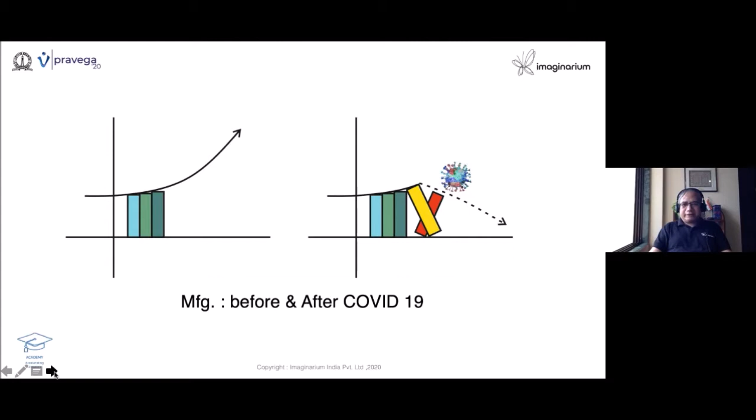Ideas are very fragile. If not parked, they will fly off. It's very, very important. And ideas are highly contagious also. So when you externalize an idea, it is very important to park it. So externalizing - whatever thought you have, you externalize it, putting it on a paper as a sketch, a doodle. And more people will look into it and they contribute to it, and that's how it is improved.

And then after you make the improvement, it has to be tested to make it better. Ideas - there is nothing like a best idea. Ideas can be better. Keep on. It is a continuous process, just like excellence. How excellence is a continuous journey towards making yourself better. Idea is also like that. Idea can only be better. There is no best idea ever.

And how ideas have been done in industry - we externalize the idea as a sketch, and then a lot of prototypes are made, and we are going to see some of them meet the needs of desirability, feasibility, and viability. These are three things which will drive how ideas reach the end user. Then you are said to have done the innovation, taking it to people.

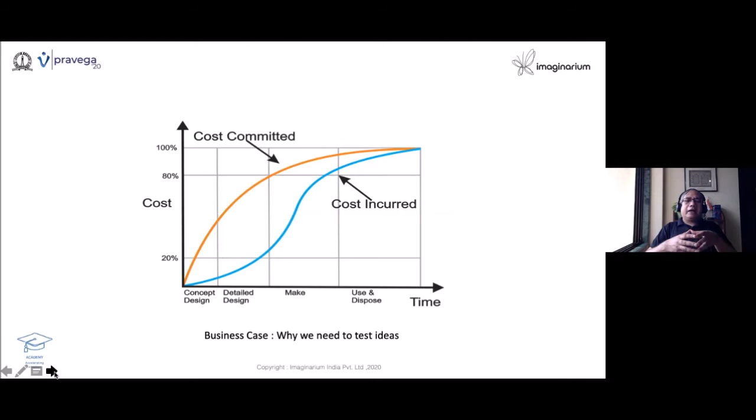And when you do detailing, and when you want to make it, somebody has to finance it. The cost committed curve you can see in orange, and the cost incurred curve, which is in blue - they are opposites. And that's why enterprises all over the world want to test the fitness of an idea, how good or how bad it is, before actually funding it. And that makes us - the idea has to be tested before it can go forward.

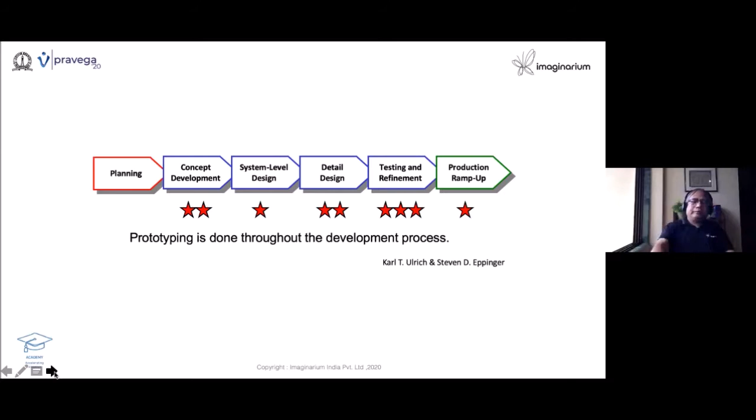So product designs are getting refined and tested till you make a somewhat good one. Then of course production ramp up also, people use prototypes. How we have been doing it before: people used to make ideas using clay, a putty material, or cardboard, or in electronics we use breadboard.

As a ham radio operator, I used to manage for some time the club station at IISc, called VU2IIS. We used to have a lot of electronic stuff, circuits, rig up and check whether it works. It never used to work in the first place. That's a new trigger to learn about why it is not working.

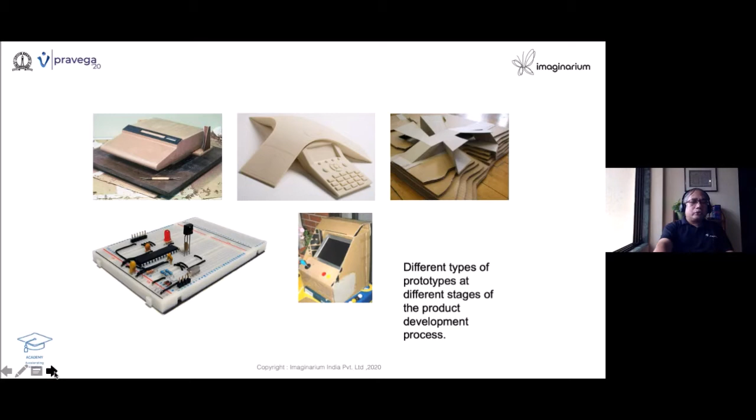So in the design iterations, a lot of these things keep happening, and it is a continuous cycle. You check and check, and then you go ahead. Today, with the advent of computers, all of these have become virtual.

You can do all kinds of animation, simulation, giving actual color and finish, those things. You can also have virtual testing by simulating on a software whether the component is fit for its intended use or not. You can even check the kinematics by having a small animation run, again a simulation.

But when you go to the industry, the boss, the people who finance or venture capitalists, you tell them, okay, I've done a design, it works fine on my computer - they'll not be convinced. You need to make them convinced by actually offering something which acts and works and demonstrates the capability. So the touch and feel of a real model is very, very important.

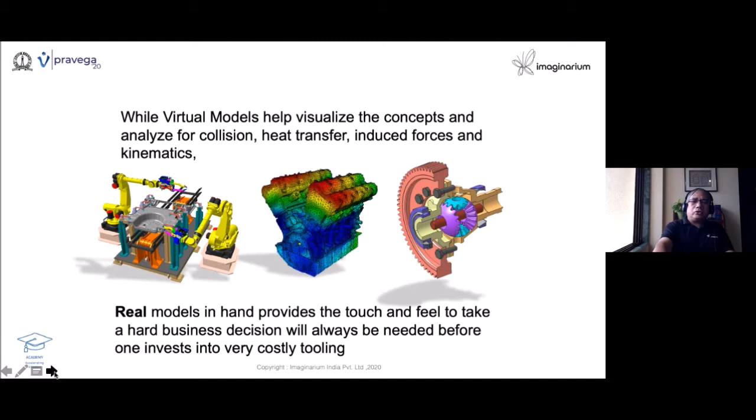And this is where many designs used to fail. There are several valleys of death. One of them is an idea which was not able to demonstrate to the quality level you intended, and that was the greatest disadvantage. And if you want to make a clay model and things like that, you need to have a lot of skill. So the whole world is looking at the prototype landscape.

If you see, it is born as a doodle, and you may go and do detailing on an engineering drawing sheet or AutoCAD. Then you can even have a 3D virtual model today. You can 3D print it. And if you want to make a working model, for example, you actually need to go to a lathe or a milling machine and make it.

So the final product will cost you a lot. A doodle doesn't, but the fidelity - a doodle cannot be tested, while a metal nut and bolt, what you see in this example, for simplicity, is going from abstract doodle to a concrete working model. So you can see here, the price will mount, the time and effort required to make a working model will also mount. Thanks to some new technologies coming, we are able to highly de-skill the whole effort.

That is the topic today. I would like to talk about bringing ideas to life quicker and better. And time to market was always a problem, even today.

You can see in the pandemic times, the whole supply chain was stopped because of the global lockdown. So people had great difficulty taking care of those things. But people who had agile manufacturing techniques were better off. Due to the pandemic, a lot of things needed hardware, and people were able to do it quickly using some of the new technologies which we discussed.

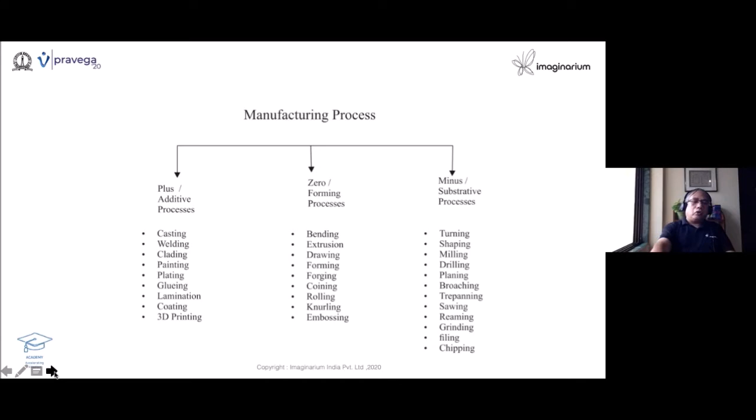Then we have the conventional manufacturing, which is largely comprised of turning, shaping, milling, drilling, planing, broaching, trepanning, sawing, reaming, grinding, filing, chipping, and it goes on. And you can see this is a very simple graphic which shows what is a cutting, what is a joining, what is a forming process.

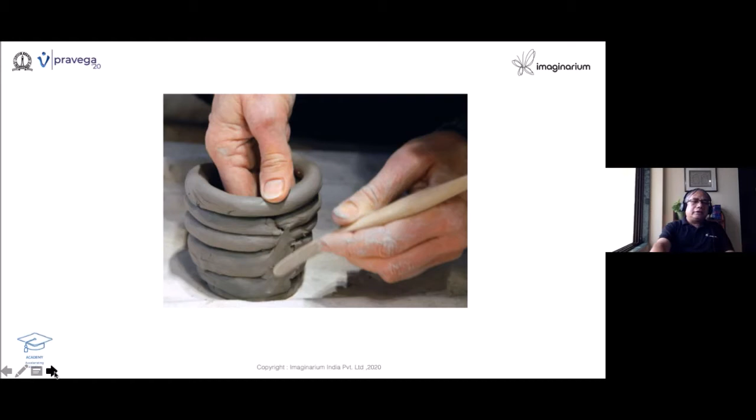Man has been toying with these, making things from the early civilizations, right? So here you can see a way of making pottery by pinching method, and this is like a turning method. And here you see there are rings which are put together one above the other, and you smudge them, and you get a pot, right? And this resulted in a lot of these things. People used to use it for storing water, storing grains, and even storing their money.

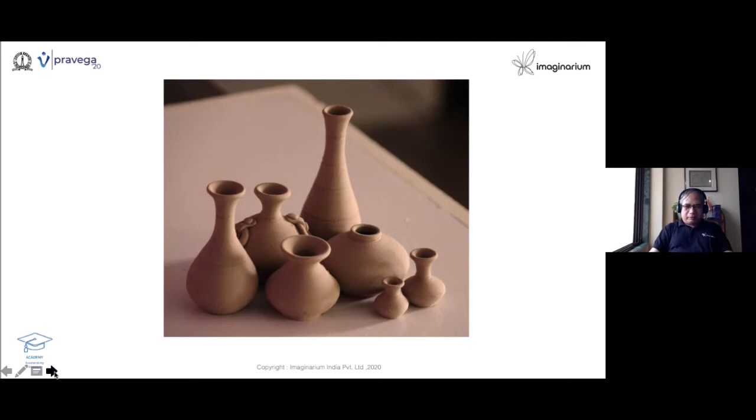Recently somebody has got gold coins in Israel, somewhere in the desert. So it used to be, they used to be better than your banks. You can store it below your own house in the earth.

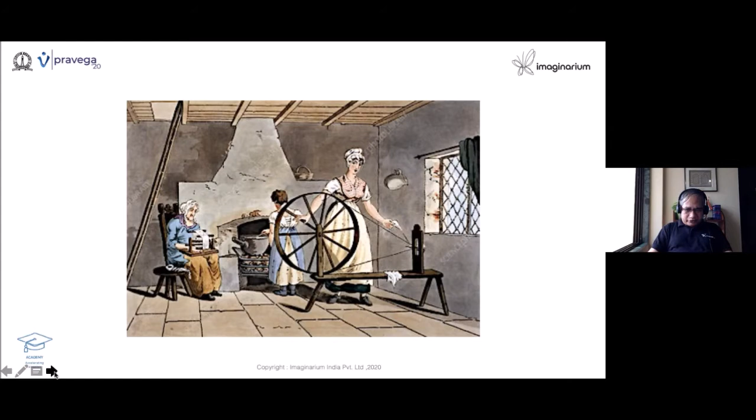Early making was always handcrafted. It was born for self-use, most of them. Like how probably you have not seen this, our grandmas used to make sweaters for us, a topi for us, and all that. So it was for self-consumption. That gave rise to cottage industry, you know, and further it gave rise to a lot of things.

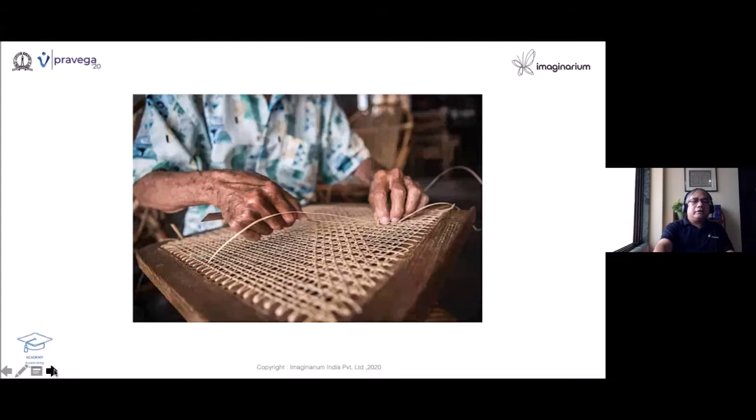So this led to what is known as industrial revolution, which made us look for things which are going to give us better efforts, the mechanical advantages. So machines were born, the hand tools were born. Hand tools, in fact, go to the antiquity. Man took a stone and made it into a tool, right?

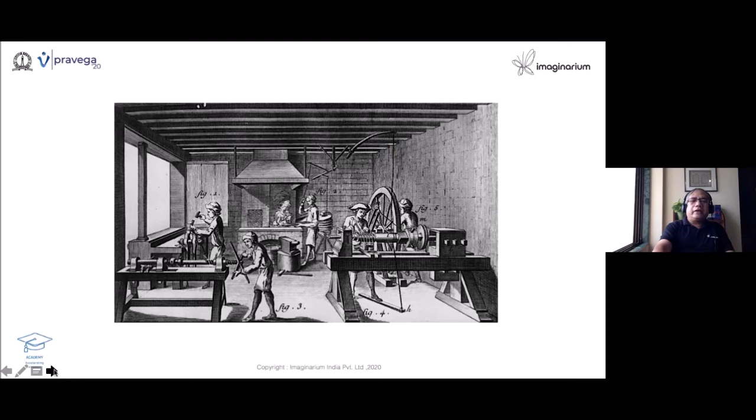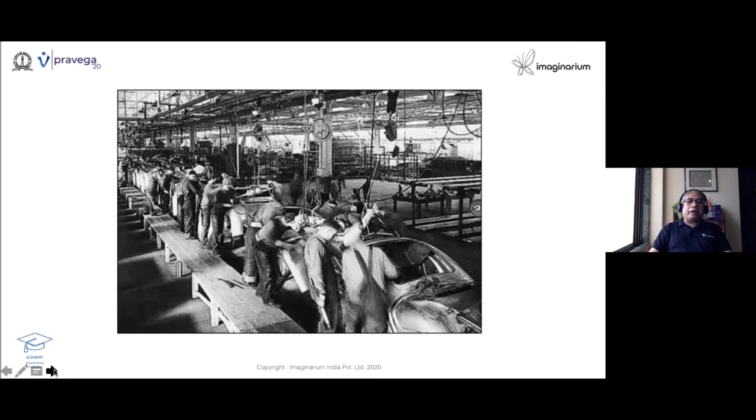Industrial township was born. And then you have the production line system. This may look like a cow shed, but it's actually Ford Automotive Company's first production line. You can see how people are working, each one adding a bit to the product. And as the chassis enters in one end, the car goes out on the other with all the four wheels put, right?

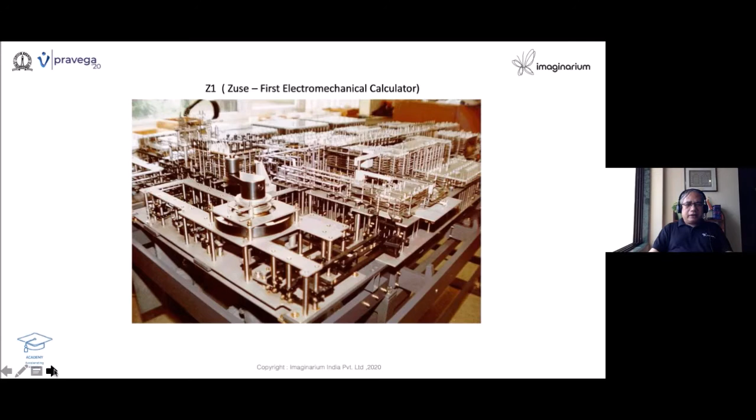And then came the advent of electromechanical devices, valve, then transistor, ICs. So you can see there is a continuous digitization of manufacturing that started happening. So if we recapitulate all this, we have the so-called industrial revolution 1, 2, 3, and 4.

So 3D printing is a new way of making things wherein people could convert any CAD into a part. It is a regime wherein people don't have to have a blueprint and give it to somebody to machine it. So the skill aspect was taken care of by a robot. I call it a robot because robots do their job. You don't have to instruct them anything apart from loading something, energy and programs, right?

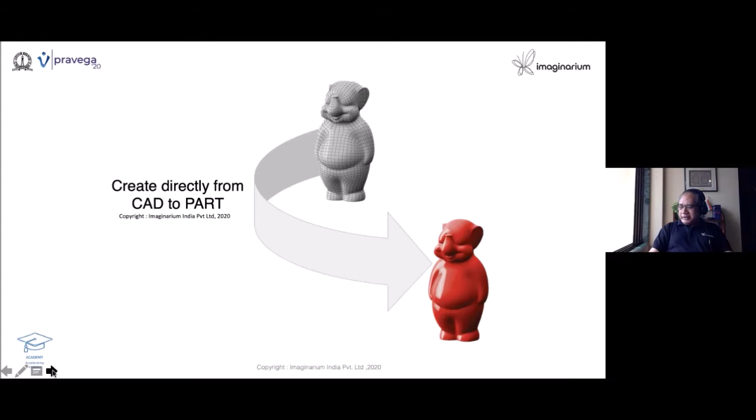So the same thing happens with the 3D printer. It is going to create objects directly from CAD data, which is virtual data, and that is converted to a physical model you can hold in your hands. So this has made bringing ideas to life much easier than before. And you can see it can not only make one-off parts, but it can make every time a different part.

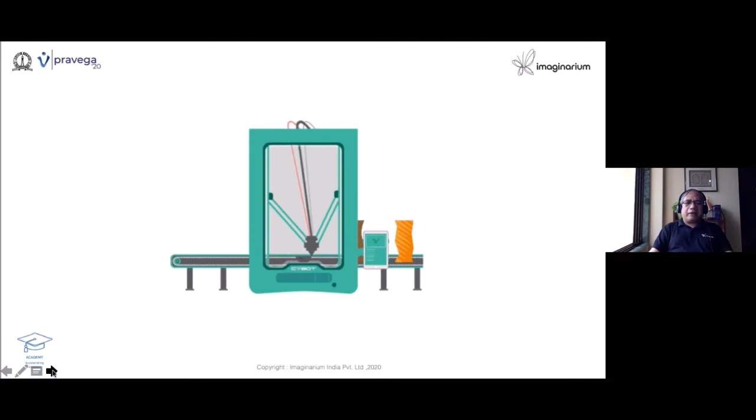And so this is the extreme agility that the technology offers. In fact, people think of 3D printing as different things. Some say it's a liquid process, some say it's a powder-based process, some say they've seen a 3D printer work with a filament. I think they're all right. It's like blind people looking at an elephant, thinking it is different things.

So 3D printing is something like an elephant. There are different types such as SLA, SLS, FDM, LOM, binder jetting, material jetting, and so on. We'll take a deeper look soon.

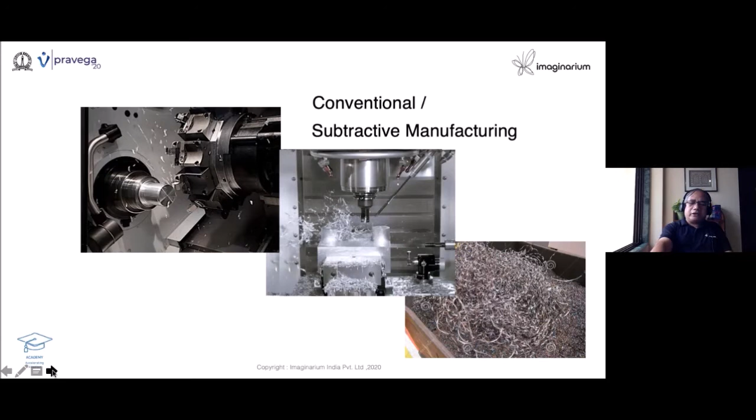Now we can see conventional subtractive manufacturing. You can imagine, in order to get one component, you have to remove a lot of material. That means a lot of energy is required and a lot of scrap is generated. So conventional manufacturing was not really a very efficient one.

If you compare it with additive manufacturing, where material is used to build instead of removing material, you can see the energy required is less and the scrap generated is also less. So we can say the additive way of making, or 3D printing, is a greener form of manufacturing.

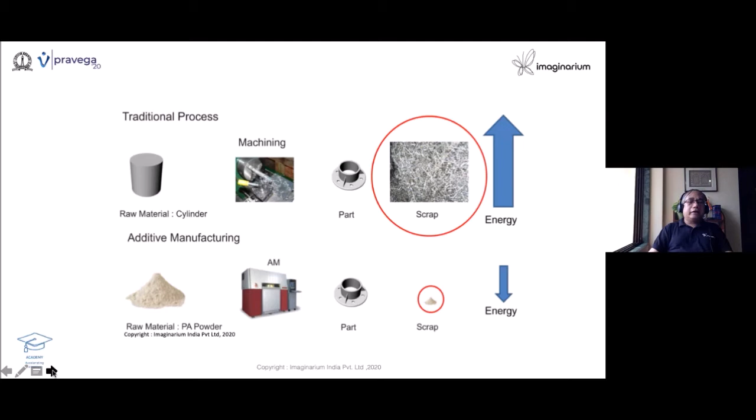Thanks to Charles Hull, he's the guy who started it all. He called the process stereolithography. Stereo means depth, lithography means printing, so depth printing. He called it SL apparatus. Even today we still call it SLA, where A stands for apparatus.

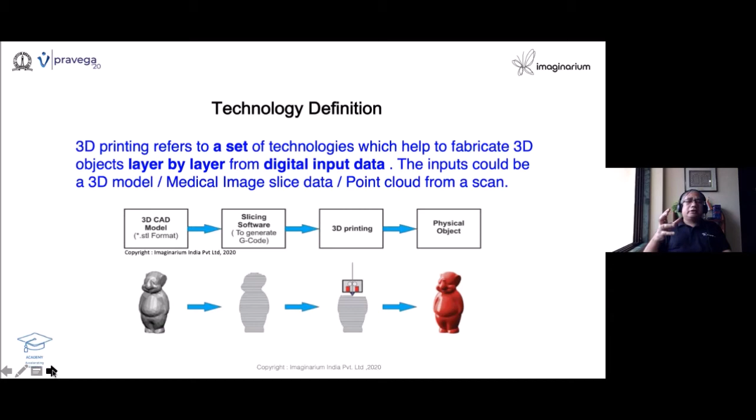Also, if I have a scanner, I can scan an object and take the point cloud data to make the part, and then once it is virtual, I can print it. So it's very important that you need virtual computer data, the digital input data, without which you cannot print anything. So here there is a small animation.

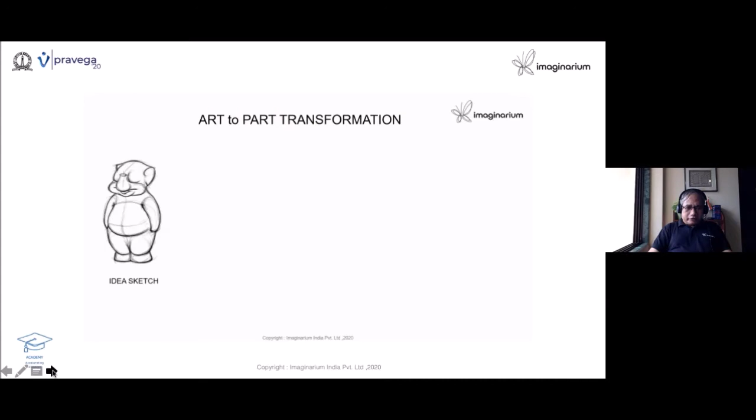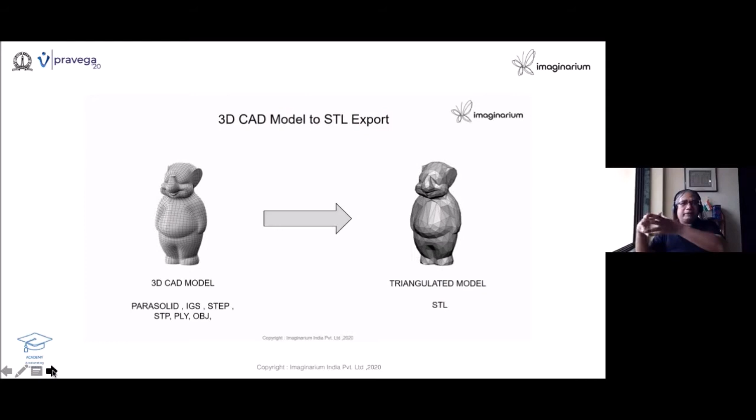You can see the art, the sketch which comes out. It has to be converted to a virtual model. And once you do that, you need to triangulate the model so it can be understood by the machine, and then you can print it. It can be different file formats like parasolid, IGS, and so on. It has to be converted to STL, and the STL is then sliced, and the slices are put layer by layer.

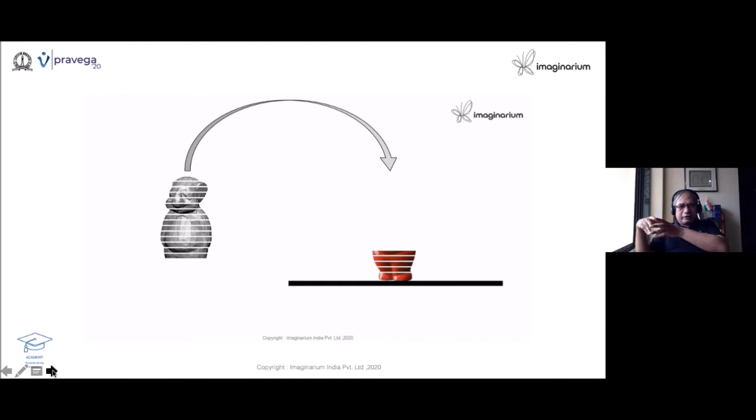It's just like dematerializing and materializing, you put the slices back. So when it prints the slices, it is like a 2D printer, only there is a Z axis, which helps you achieve the thickness. You can see here how the object is put back, the layers are recalled, and because the head is going up, you get an object.

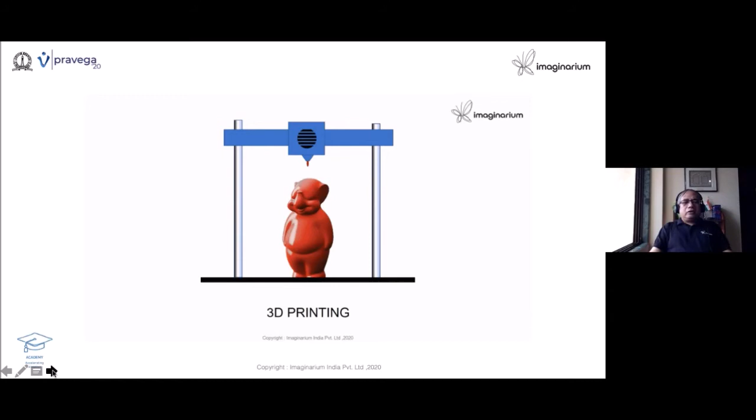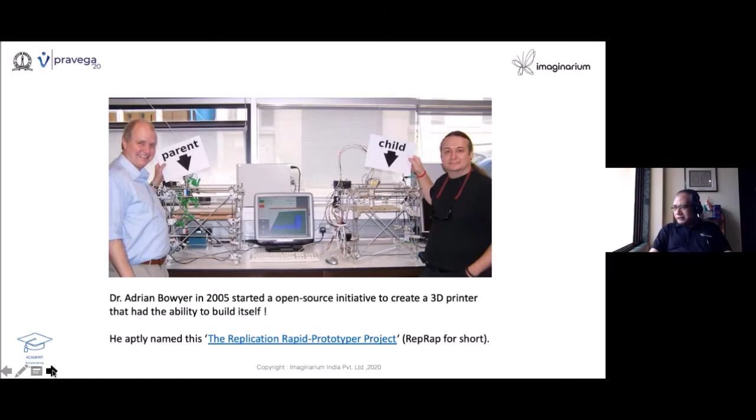Dr. Adrian and others started thinking this 3D printer can print itself, a parent and a child. And soon the technology, FDM, became open source. Today we have a lot of such FDM clones, which are now used by makers or hobby people. I'm sure in IISc also you must be having a lot of such small printers.

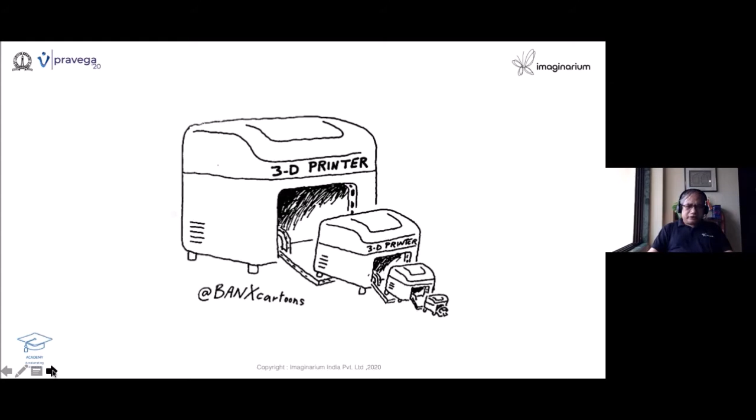Especially I really like it. It is like your fast food, the Golgappa wala who gives you masala puri and pani puri and whatnot, all that.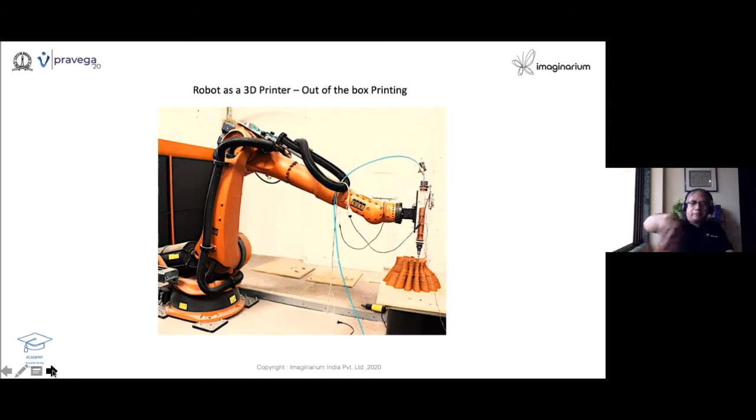Well, this is not a 3D printer. Why is it not a 3D printer? Because there is no digital input data here. If this is put on a robot, and you send the digital signal, then this will also become a 3D printer. Let us see how it works.

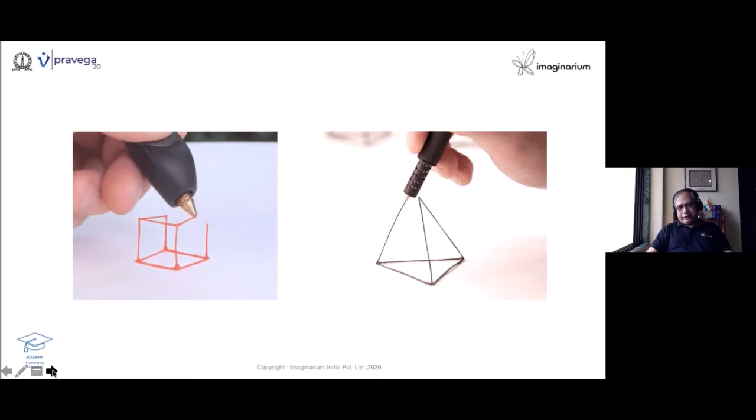Moving forward, today there are a lot of different sizes and shapes of these. They handle non-metals and metals, ferrous and non-ferrous, so their operating temperatures are different. Some are small, some are big, and this will be the future of industry.

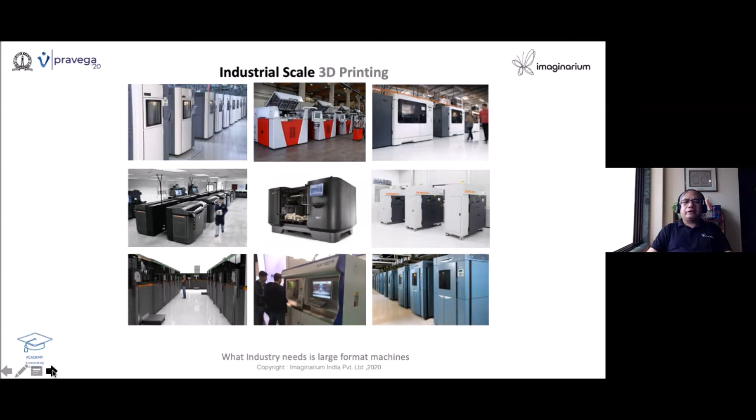No grease, no sound, no great energy required. They all run on battery, connected to 5G, 6G. They can be operated anywhere in the world, right? So there is no need for such things. This technology is making deep inroads in every possible sector.

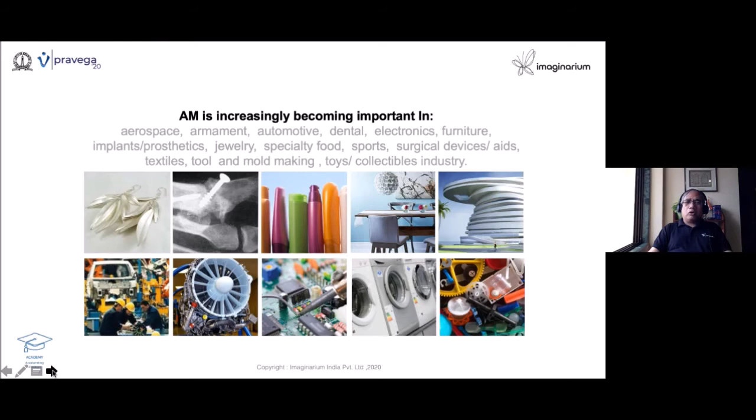You can think of jewelry, medical, FMCG packaging, lifestyle, architecture, automotive, aerospace, electrical electronics, white goods, plastics, and more. So this technology, what it offers - there are, according to me, as a practitioner for the last 20 years...

I in fact started running a 3D printer in IISc, in CPDM, in 2000. We acquired a little 3D printer called Prodigy, and I used to run it day and night. Anytime I go, it was one room, one machine, one key, and I used to do a lot of printing for EPIDAP and others. The mechanical engineering department and TCS had a collaboration, and we used to do a lot of things for industry also. Besides that, training, research, etc.

So, according to me, there are six main features which add value to this technology. One is part consolidation. What is meant by part consolidation? So if you think of a box, if you have a top lid and bottom, you want to open and close it, so you have a hinge, right? And in order to make the hinge, you have part one, part two, and you have to put a pin.

And all, then there are a lot of rivets which go, there are buckles in the front. Today, a box which was earlier made of 20, 30 parts, today we can make out of just one part. So this way of bringing all functionality in one go is called part consolidation. So bill of material of earlier 20, 30 parts will now become just one. This brings a lot of good reliability in the system, because reliability depends on the number of parts - each variable can become a weak link in the system, right? So part consolidation is one of the greatest uses or features 3D printing brings.

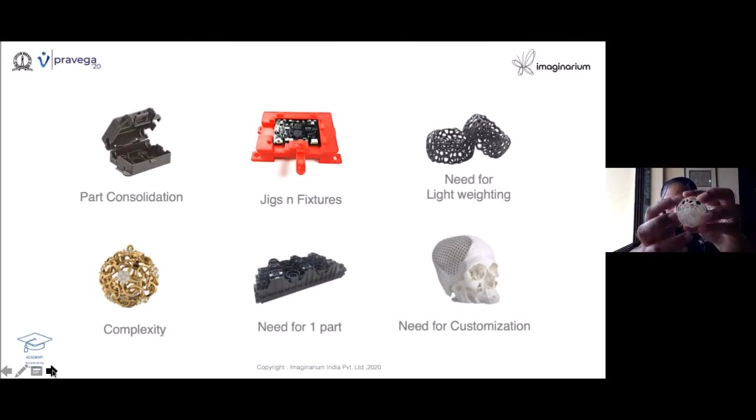And here you see this is an impossible object, because in CAD there is no gravity. So when I make it with a lot of voids, all floating in CAD, I export it and print it. And after I take out the powder it's made up of - sintered powder - that all falls off from these voids, and they all fall one inside the other.

So you get an impossible object, which is very complex to make from injection molding or die casting or any other way we had before. And also, the world is going for highest complexity and lowest quantity needs.

So there's a need for one part. How can you manufacture one part? Your house - you actually manufacture it as one part, right? You don't build many houses. When you come to cities, they manufacture houses one upon the other - we call it flats, right? So still in the world there is a need for one part, and this technology helps you to make one part.

Now coming to customization needs - any kind of customization, like we find in medical, a lot of customization needs are there. You require this technology very badly, because all of us are unique people, right? We have our own unique dimensions. So if you want to make something suitable to humans, have a perfect match, you need this technology.

Moving forward, here's one very typical example of the value this brings - the GE leap fuel nozzle tip. 20 parts to one part, and because of which it has become 5 times more durable, weight reduction of 25%, and it's 30% more cost effective. Also, since it can be printed on demand, there is no need to keep inventory. You keep a digital inventory, recall whenever you require, and produce on demand. This reduces the inventory carrying cost and things like that.

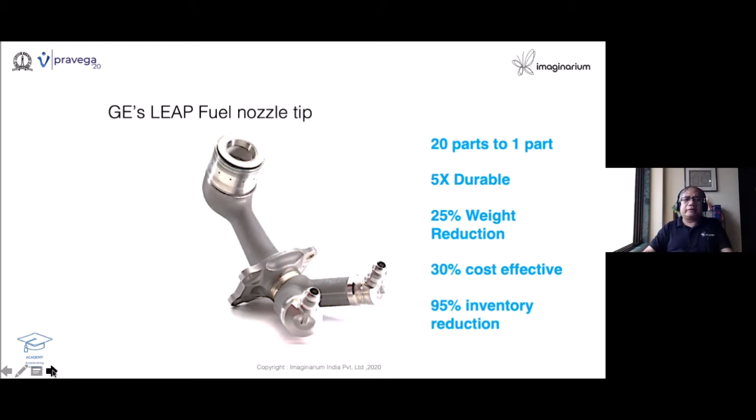People are thinking of making biobots which go inside the body and can deliver drugs using such small parts produced. In fact, at IIT Bombay, there is one professor, Prasanna Gandhi, who is working on micro stereolithography.

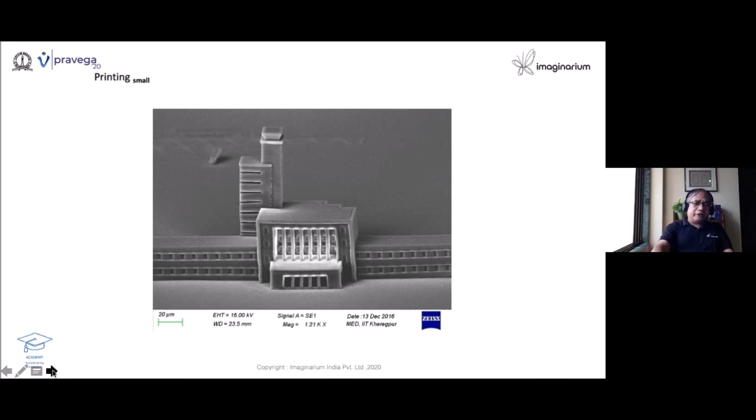In this technology, there is no economy of scale - that means even if I make hundreds or thousands, the cost will not come down. Maybe slightly it may reduce, a slight gradient you may give. On the other hand, the complexity comes for free - no matter whether you do a simple object or a very complex object, the 3D printer will not demand anything more.

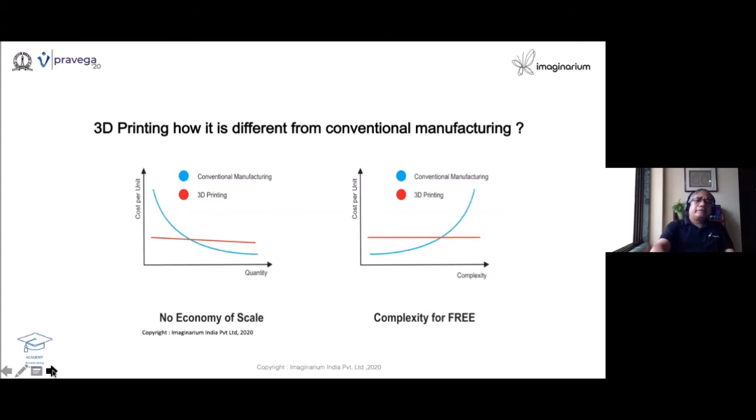So where do we apply this technology? Complexity is where this technology is best used. If you want to use it in bulk production, like producing a washer, producing nuts and bolts, this is not the right technology - it has to be applied with its strength, not its weaknesses. Injection molding and die casting are high volume processes. Investment casting, vacuum casting come somewhere in between. CNC machining again has limitations in terms of how much it can handle complexity.

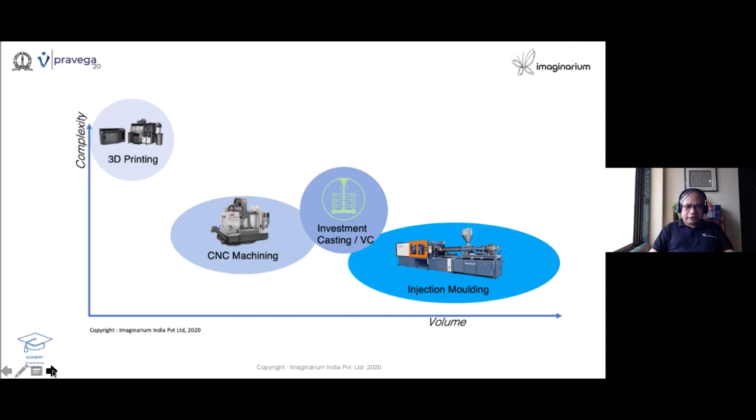When it comes to complexity, nothing beats the new technology, 3D printing. It also helps make small batch production possible. Once you make a 3D printed part, you can use it as a pattern and actually produce from it. You can see a lot of things like this can be produced in various shapes and sizes. Design will lead consumption, and manufacturing will be taken for granted in future.

I think it's 11:42 now. We'll try to go fast.

All these technologies have arrived. It's interesting that when we talk about customization, the children born in 2000 and later are called millennials, and we have Gen X, Gen Y people who want to be unique. They want to consume things that say 'we have arrived' and they want to stand out in the crowd. It takes all kinds to make a world, and we need to make customized things for everyone. There's also a human tendency - whatever you buy in the morning, you start hating by the evening.

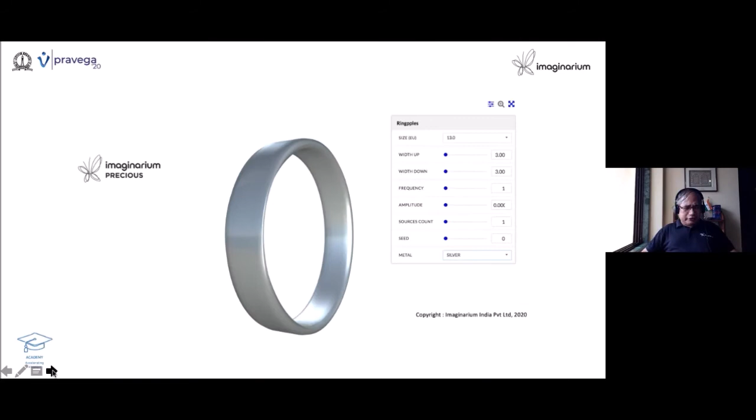So let us demonstrate this. Let us take a simple band. On the right hand side you have a lookup table with a lot of parameters. When you parameterize this, you can see the ring takes different forms. This is going to be the future - people are going to curate designs, put it out, designers will be in the background creating all the stuff, and the user will just consume. He thinks he is the designer.

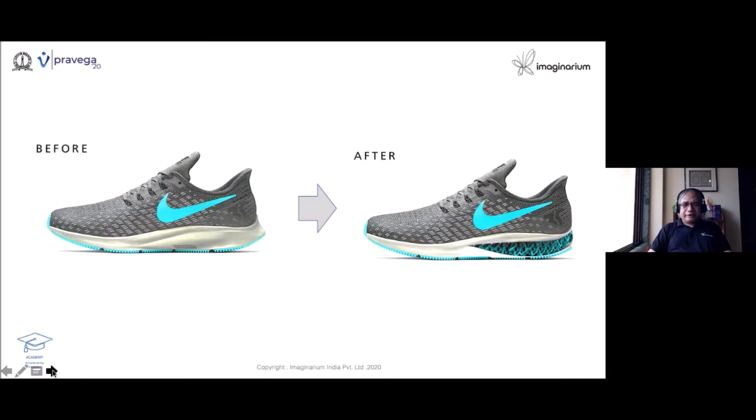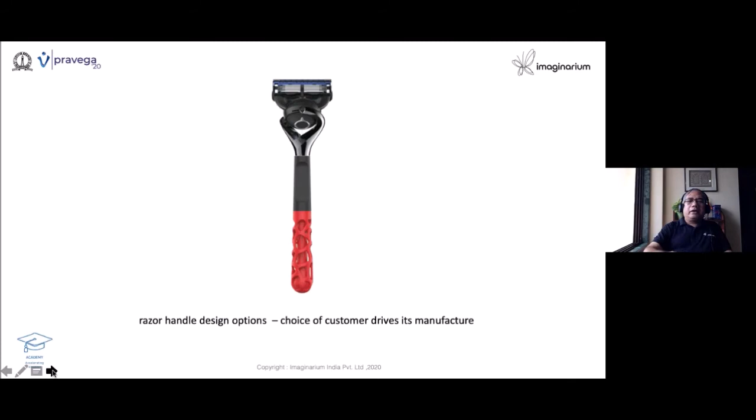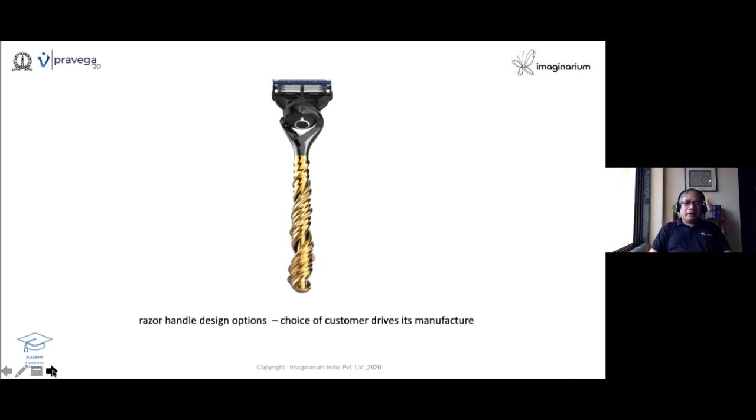For example, even sportswear, shirts, jewelry, spectacles, your food - everything will be done with parametrics in future. Even razor makers have recently joined this movement. You can go to the website and choose whatever handle you want - these are all available. So in future, designers will contribute to such things where the user has an option to choose from, and they can also do a bit of designing themselves. So there is a co-creation that happens.

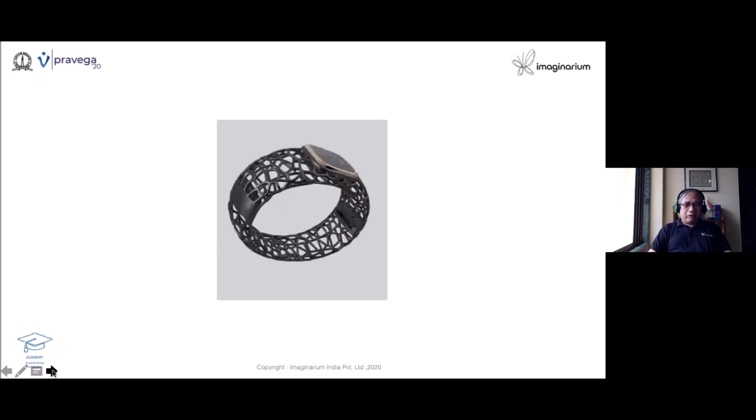You can see here, people have virtual reality, augmented reality, mixed reality coming into play, making an experience of consumption even before they buy it. They can try it out. This gives the so-called new customer, who doesn't know anything, a way to actually find a lot of value.

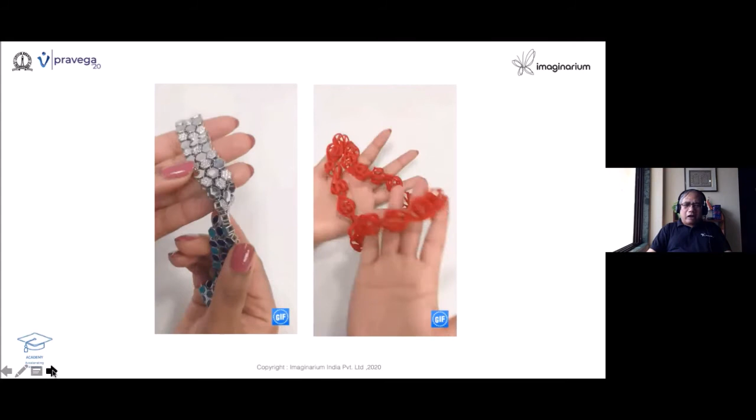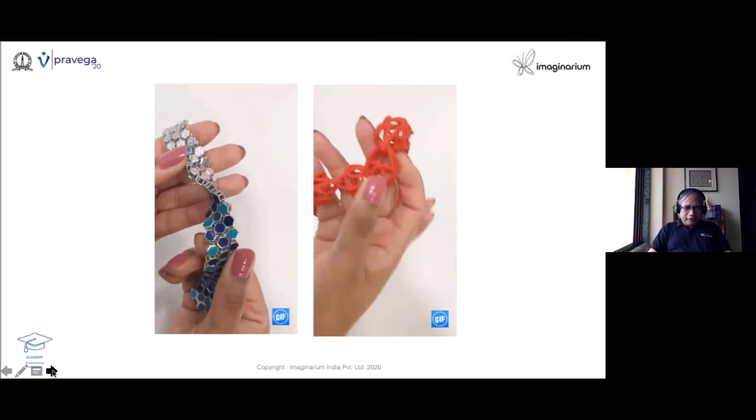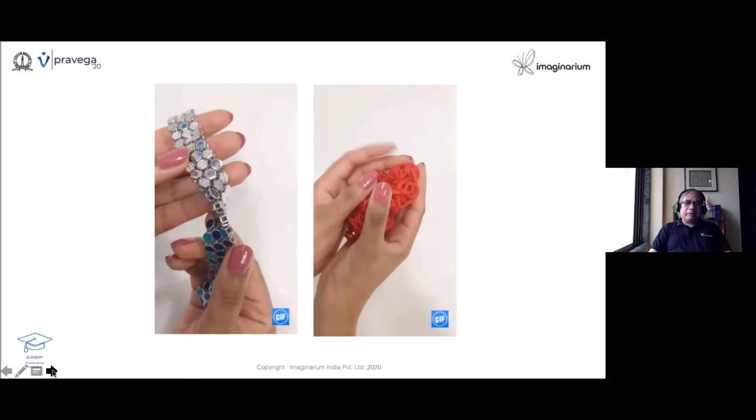You can see here how some of these are articulating, and movement is there - actually printed as one part. Can you imagine? There's no assembly here. Of course putting diamond or filling enamel is a post treatment, and the red necklace with red color can be pigmented with any color, but the basic stuff is 3D printed. It is complex, and there is no need for a laborer to assemble them. Very important.

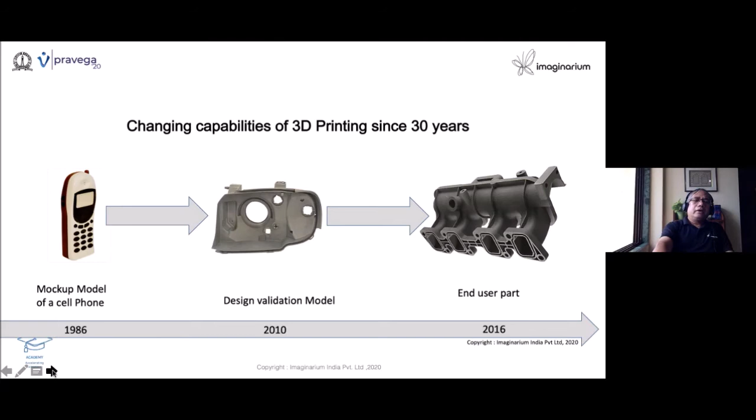The future of 3D printing is moving beyond prototyping to parts for end use, with steady improvement in technology. What used to be only a mock-up or dumb model, then a design validation model, is now a model that can be used at the end user application in the context where it is going to be used. Some technologies are helping this. HP's Jet Fusion has low solution cost but very high speed, and similar things like high speed sintering are going to disrupt and bring more such advances into industry.

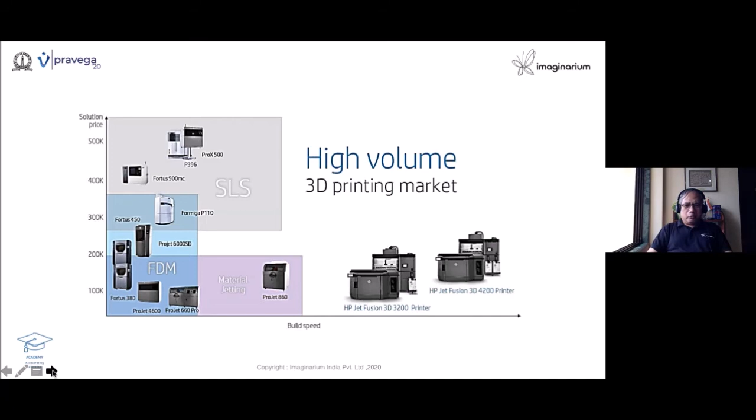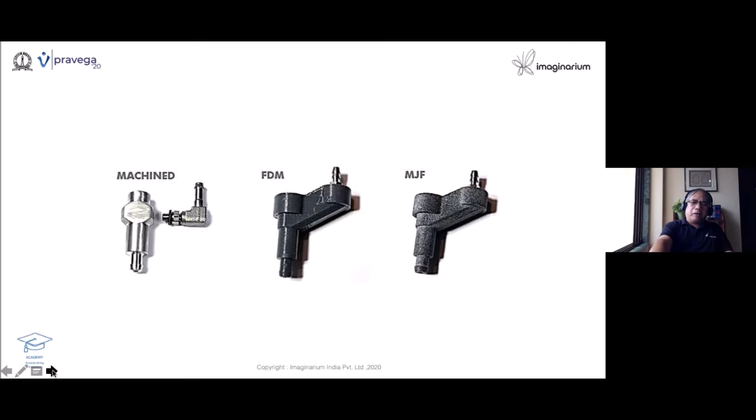Today we are able to have live hinges like this. We can even convert metal parts to polymer, with the metal part used only as an insert. Such conversion is possible. You can see the complexity of these models, all used for end user applications. You can produce just one, the minimum order quantity of one, and that is very important.

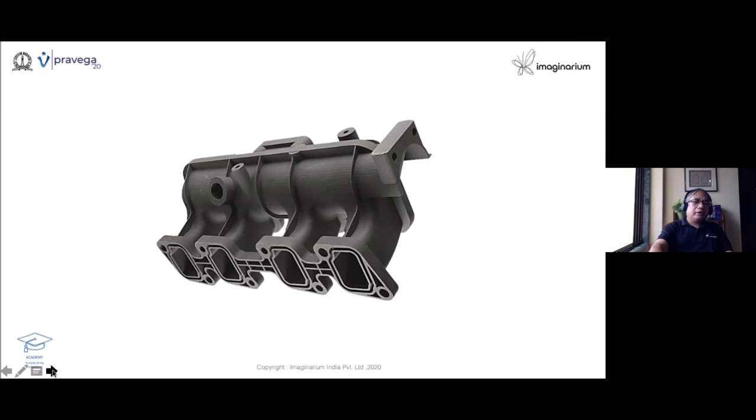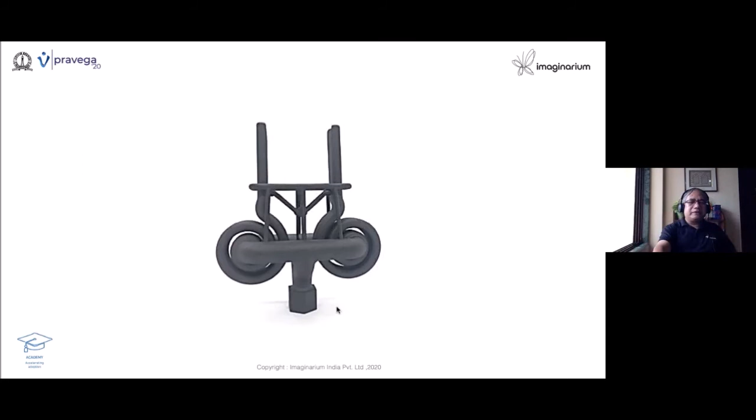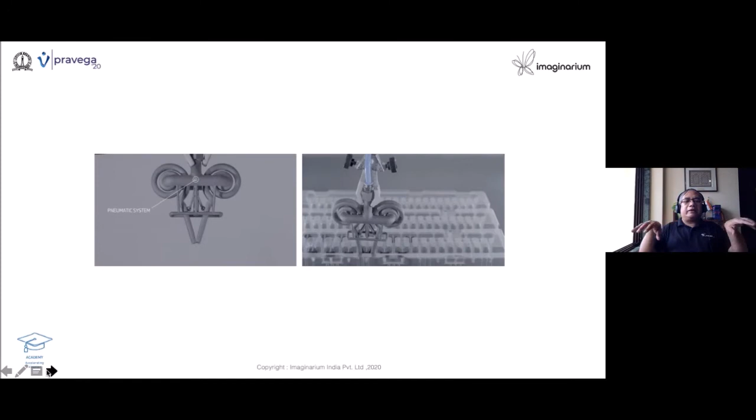They deform. Let me show you the animation now. See the capability: when compressed air or a pneumatic system powers it, the whole system expands, and there is a tongue that comes out, shown in the application on the right side. A pick and place robotic actuator is actually made out of this compliant mechanism. You print this as one part and use it, and it will have maximum life, believe me.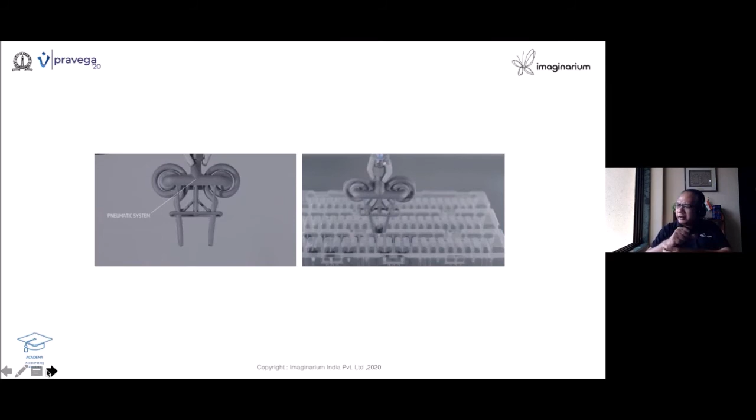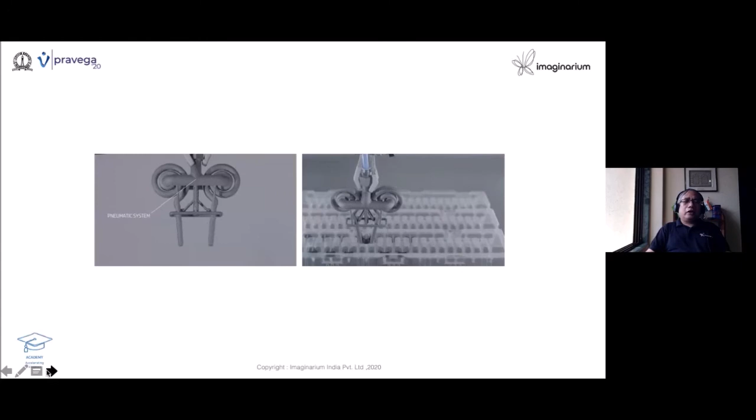Compliant mechanisms are studied with great interest. The concept is almost 100 years old, but earlier they were not able to actually make it. Thanks to new technology, it is now possible to make compliant mechanisms work, and so they are being adopted widely now.

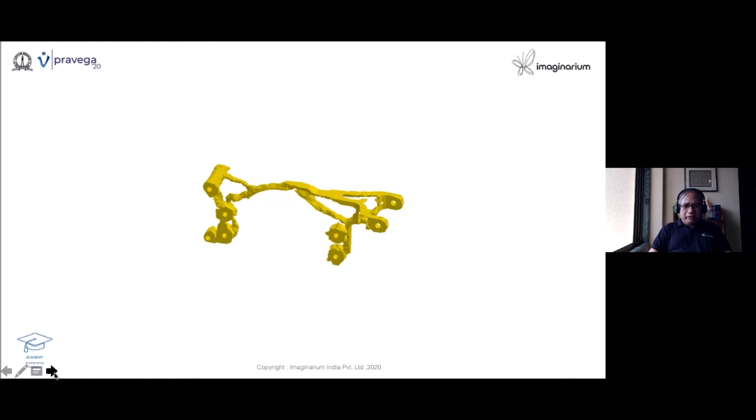You can see the dexterity of a hand can now be brought into robots, because some of these new forms can be made and tried out easily. So we are going to have more human-like robots which will ape your nimble hands to carve out things in the future. Optimization of parts is going to happen through mathematics, topology optimization, and artificial intelligence, and digital manufacturing is going to be driven by such tools in the future. So the designer has to think and choose, and will have a different role to play.

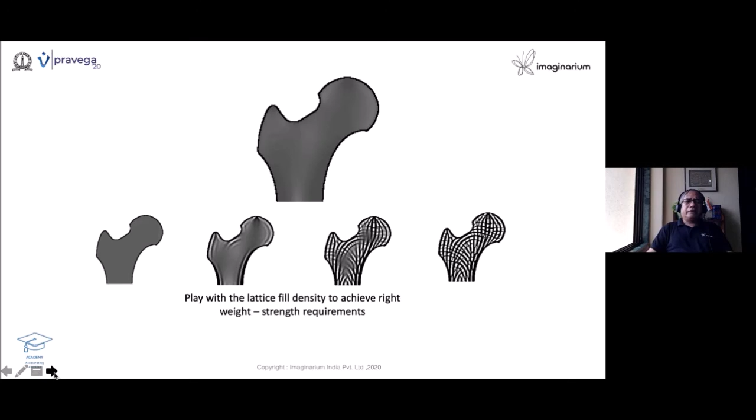Some of these can be virtually tried out and done. You can see here that different properties can be incorporated by having a lattice, just like in nature, such as bones, tree branches, and even shells, which are all made up of such varying properties. Such things are possible today thanks to new technology.

Such things are possible. Looking forward, you have microfabrication possible, and mega sized things possible too, along with small and medium and large sizes. Small and medium will now move to include large, while microfabrication remains specialized, and mega will also remain. Small, medium, and large will cater to the world's needs.

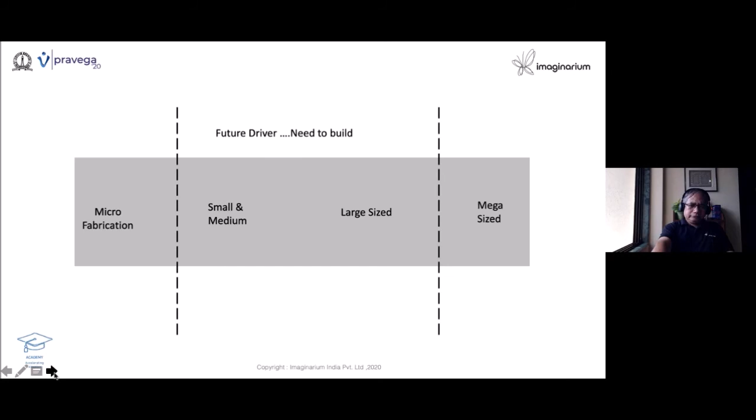Individual designers, makers, and artists will depend on a cloud factory. Today we have a cloud factory at Imaginarium. You upload anything, demand what material and finish you want, and you will get it. So future factories, the OEMs, MSMEs, and SMEs may use printers, but individual designers, makers, and artists will depend on the cloud factory.

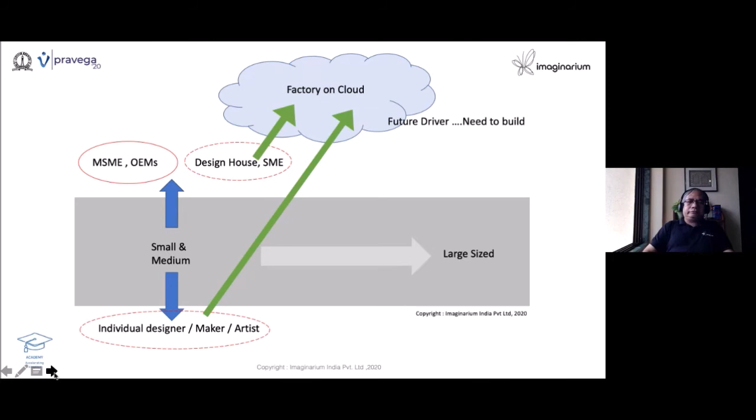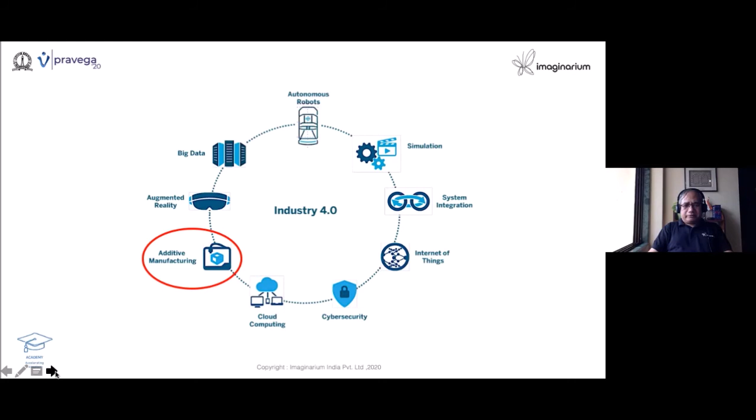In the scheme of Industry 4.0, additive manufacturing is an important player in the cyber physical system. It brings the physical side of it, along with the robot and CNC, so they form what is known as the hardware trinity. Hybrid manufacturing systems are already making their appearance in the manufacturing sector, and Industry 4.0 will have lots of such systems.

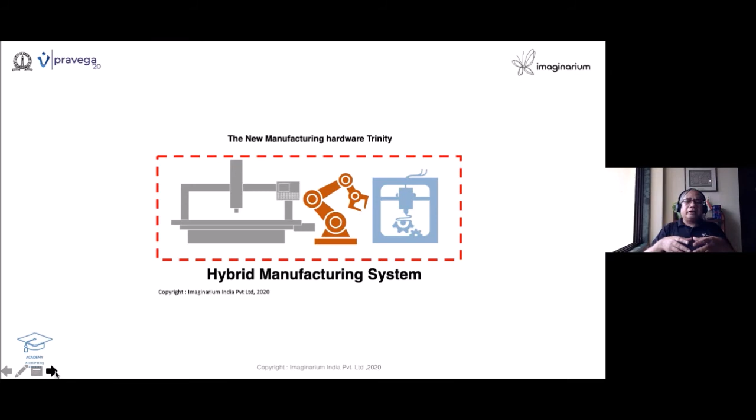There is a digital switch in supply chain management - supply chain will become demand chain. And product will transform into value, so the focus will shift from product to value.

In the whole ecosystem, idea and design enter here - they have to become a CAD model before you can actually 3D print anything. So reverse engineering, or from the top, design for additive manufacturing, because we need to unlearn the ways of earlier methods in order to use this technology. Then of course you have to pre-process it, and 3D printing needs material and also care. Post-processing is required, and then you have the world of opportunities. This forms the spectrum of digital manufacturing.

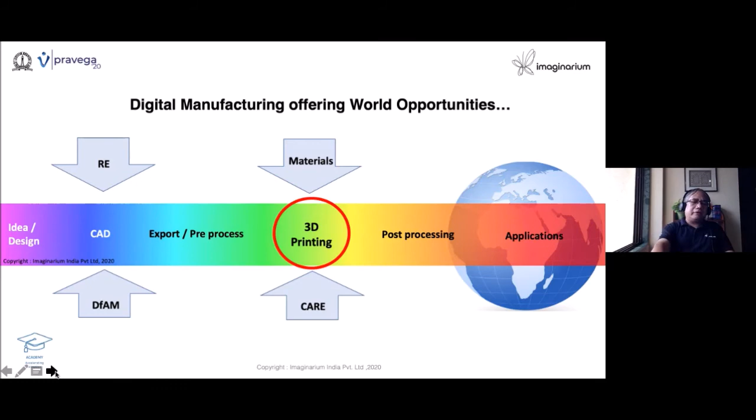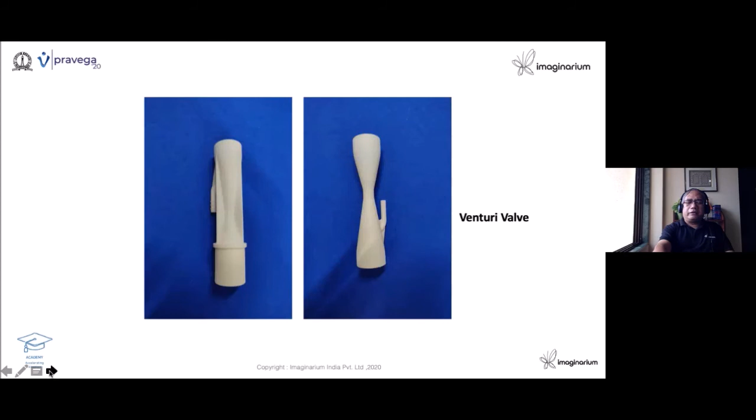For COVID time, we have done a lot of such products. As you can see here, ventilator splitters we have done - you can see how they are applied - and we have done venturi valves also on demand. Many things we have done like this, even the door handle, and we have done these quickly. With laser cutting and 3D printing, we are able to do many things much faster.

The whole world is looking at different ways of making things, and in the future 3D printers will actually be robots. You can see how it is making, from digital input data, creating things.

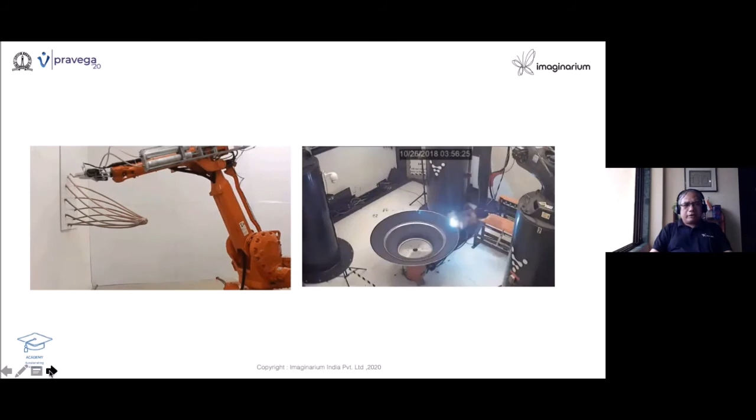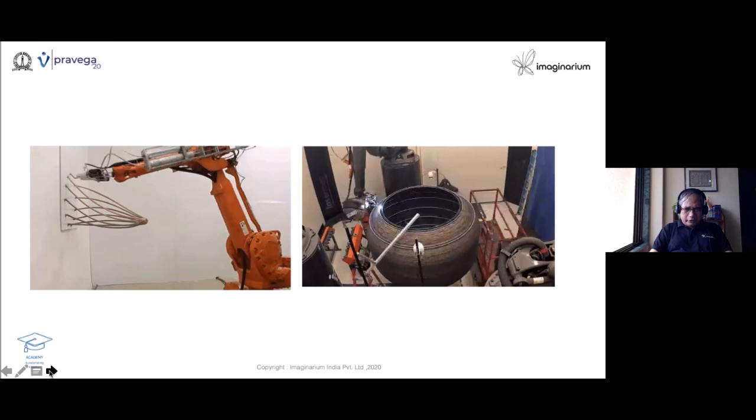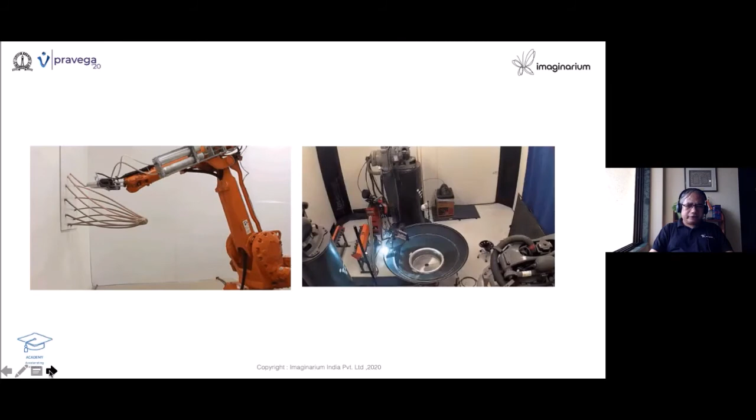Horizontally, vertically, and otherwise - on the right hand side, you have a rocket being made by a Stargate 3D printer, which is essentially a robot depositing metal. This is from Relativity, the so-called competitor to SpaceX. They're also working on space programs. These are the future of this technology.

I think with this, let us have this wonderful statement. Let us recall: I do not fix my problems, I fix my thinking, then the problems will fix themselves. Very nicely said by Louise Hay.